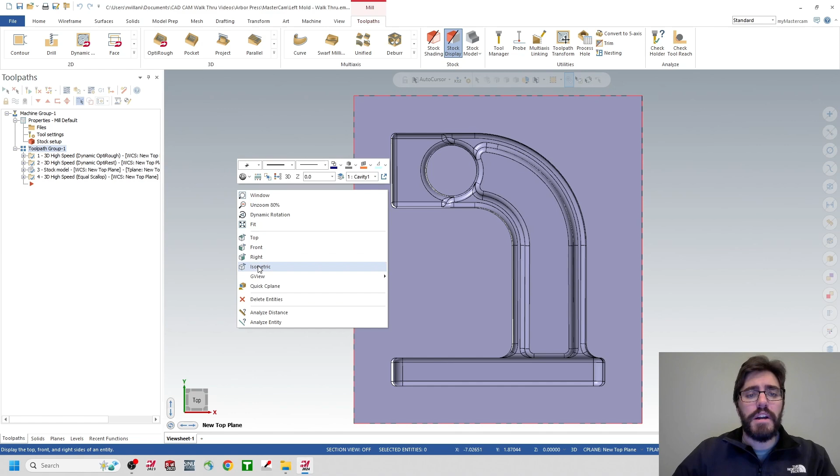In this video, we're going to take a look at the left side mold of our Arbor Press P2 in MasterCam, focusing on the 3D toolpath gallery. On the left-hand side of my operations manager, I'm doing this entire part with just a few toolpaths. I've already finished this, so I'll step through it and then begin the walkthrough. Our first toolpath is going to be an OptiRough using a flat end mill, where we're just trying to remove as much material as possible.

The second toolpath is just going to be a copy-paste of that OptiRough, but instead of a flat end mill, we're going to use a bullnose end mill so that we can clean up some of the corners a little bit easier while still recognizing the stock removed from the first operation.

The next toolpath is going to be a stock model, and we're just trying to recognize all the material that's been removed from the first and second operations so that we can use it and verify. I don't want to have to keep running these toolpaths over and over again, I just want to reference what's been removed.

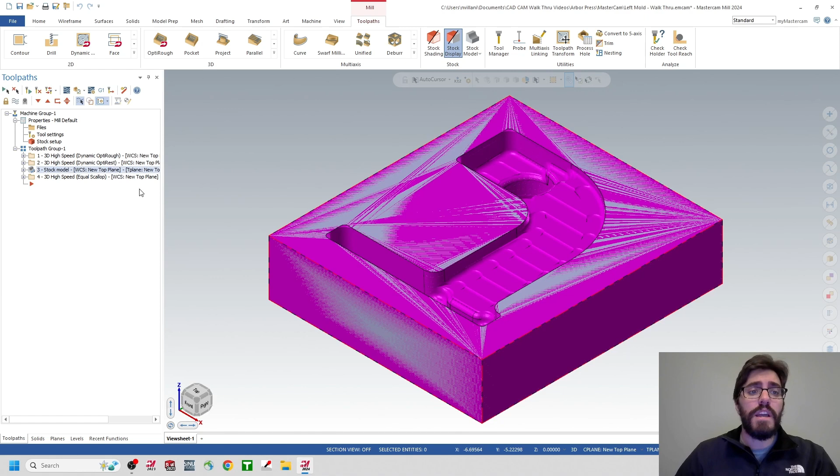Then we can move into our fourth toolpath, which is going to be an equal scallop that we can use to finish all the edges down to their final size using a ball nose end mill. So let's go ahead and get started.

I'm going to delete my entire toolpath group here so that I don't have any toolpaths active in my operations manager. As a disclaimer, I've already set up my tool library as well as my planes and my stock material. So the first toolpath I want to take a look at is the OptiRough.

It's going to be located here in the 3D toolpath gallery, and should be the first icon. But if we hit the drop-down menu, I want to mention that we have a roughing selection as well as a finishing selection. Inside roughing, we're trying to remove as much material as possible, and the finishing selection only focuses on that final pass.

Right now we're just trying to rough, so I'm going to click on the dynamic OptiRough, and this opens up your parameters window for that 3D toolpath. This is going to look a little different from what we're used to seeing in 2D selections, where maybe we're just picking an edge or a continuous chain. Now we're trying to select all the surfaces that are going to be considered for machining.

On the left-hand side of this window we have our machining geometry, and on the right-hand side we have our avoidance geometry. They're represented by the green and red boxes, and I want to focus on the machining geometry first because I want to pick all these internal surfaces for the mold.

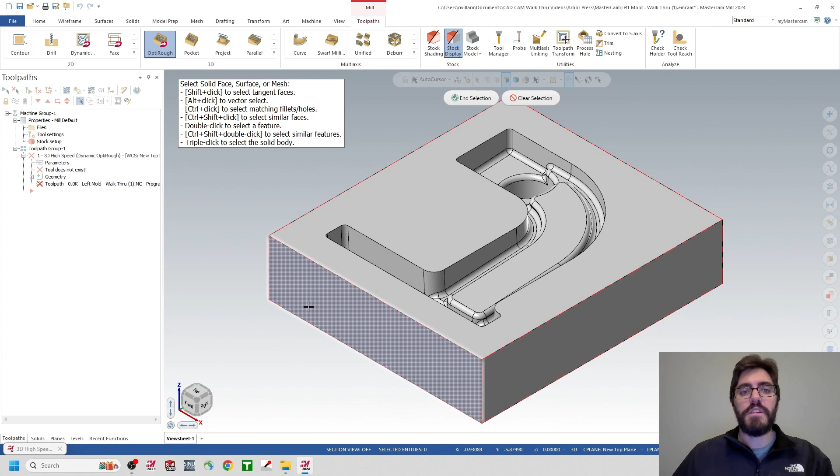On the left-hand side of this window for machining geometry, I'm going to go to the bottom of it, and I should see this mouse pointer. Click on that, and this should start to allow you to make selections to be considered for 3D machining. I want to mention this tooltip window at the top left — it says select solid face, surface, or mesh, and gives you a handful of ways to select these entities without making it too much of a pain on yourself.

For example, if I was clicking on these one by one, I'd have a lot of entities to click. However, if I hold down the shift key and double click on one of these faces, it's going to pick up all the tangential faces in that selection. So click end selection, and you can see now that I've selected 103 entities, currently shown in the background with all these faces highlighted in green.

Additionally, I have the ability to control my wall stock as well as my floor stock. By default, both these values are set to 50 thousandths, and I think that's a little too much. We're going to decrease this down to 10 thousandths — I'll double click on the cell and type 0.01 for wall stock, then double click the cell for floor stock and type 0.01. We're not going to worry about the avoidance geometry.

I'm going to leave this alone for now, and we'll jump down into our toolpath control tab. I'm not going to make any changes here. I want to leave it as the default value, and I'll show you how to troubleshoot this later. The only thing I want to change is our cutting strategy. Currently it's set to from outside, which means the tool will crash into all these sidewalls trying to cut these surfaces. So we're going to toggle this to stay inside, and you can leave the compensation here to center.

We'll jump down into our tool tab. As I said before, we're going to use a flat end mill to try to rough out as much material as possible, so I'm going to use the 5/8 flat end mill here. This is going to be our roughing tool, and I'll just say OptiRough 0.625 end mill for my note.

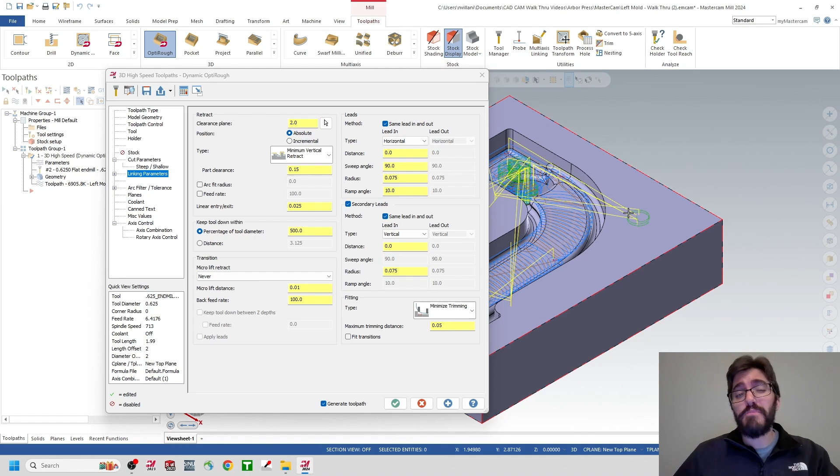Now there are 2 ways we can go about controlling this toolpath so it doesn't enter the areas we didn't specify for machining. The first and probably easiest is to come up here to Model Geometry, click on that, and we have our Machining Geometry section as well as the Avoidance Geometry selection. Right now we don't have anything selected for avoidance, so let's change that.

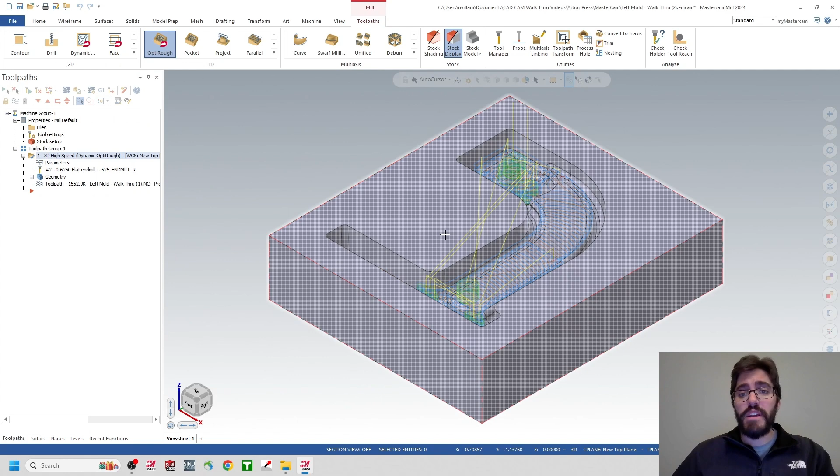We'll go down to the bottom right where we have that mouse button to select entities, click on that, and we're just going to select this entire top face, then click End Selection. You can see our avoidance region is all highlighted here in red. Let's hit the green check mark and let this regenerate. You can see that did a pretty good job at trying to control that toolpath to just this region for that pocket. We no longer have the tool entering in the areas we didn't specify for machining.

And if for whatever reason this avoidance region selection doesn't work for you, the alternate way we can control this toolpath is to use a containment boundary. So really quickly I'll show you how to do that.

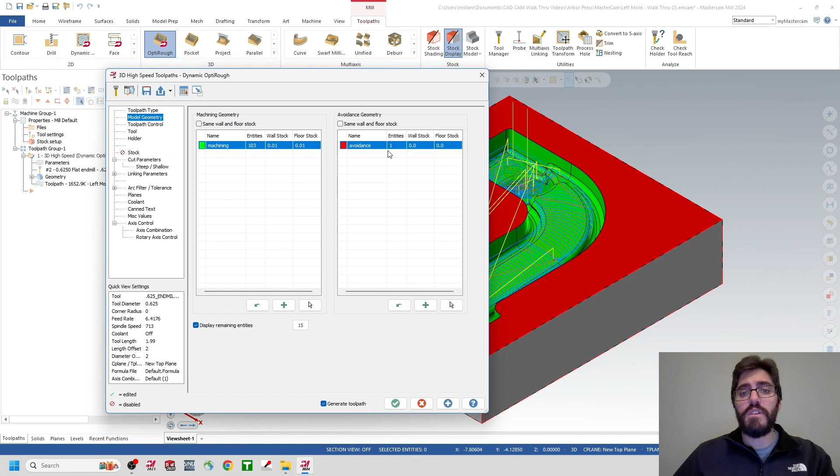We'll go back into our parameters. You can see here in the avoidance region we just have one entity selected. If I want to remove that entity, I just select entities once again, clear the selections, then click End Selections, and now I have 0 entities selected.

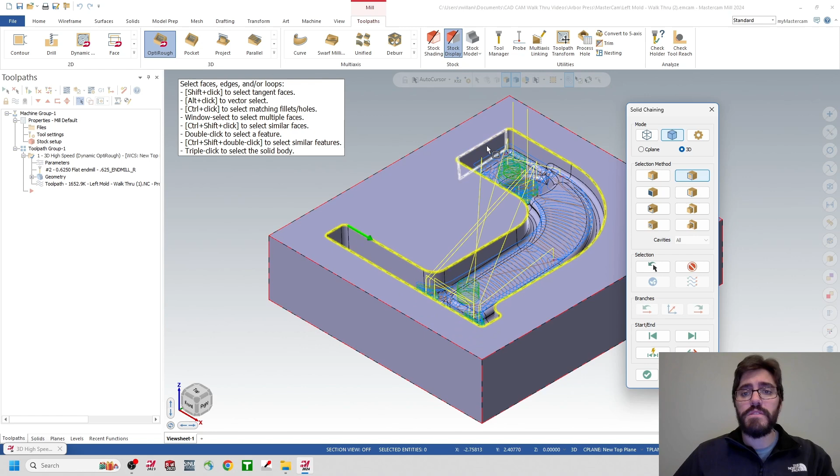Then I'll jump down into my Toolpath Control tab, and we're going to look at the containment boundaries. So the boundary chains right here—we'll click on the mouse button for the containment boundary, making sure we're chaining from a solid loop. We'll select this entire loop on the top face so all of this gets selected, then hit the green check mark, hit it once again, and let that regenerate.

And you can see we're getting the exact same result. We're just using 2 different methods of controlling that toolpath—either using the avoidance region to avoid certain surfaces, or using the containment boundary to force the tool to stay within a specific area.

I can't tell you if one is better than the other. I'm sure there are use case scenarios for both, but I've had a little bit more luck lately using the containment boundary to control that toolpath. So just keep that in mind if you're troubleshooting and not getting the results you want.

Now let's take a look at this toolpath and verify just to double check that we're truly containing ourselves to this region and won't crash into any of the sidewalls. We'll move over here on the left-hand side in our Operations Manager. At the top of the window, we'll click on Verify, and then I'm just going to let this play out. So click Play.

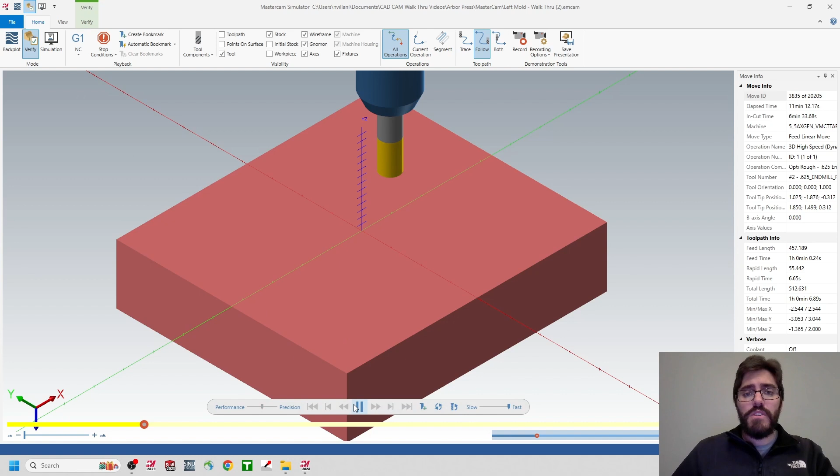You can see that the toolpath is now contained to that region, and we're just traveling around the outside contour of that mold, stair-stepping down as we go, which is cleaning up as much material as possible. This is going to take a lot of cutting pressure off the next toolpath, the bullnose end mill, and eventually the finishing toolpath for the ball nose end mill. I think we did a pretty great job roughing this out, and we can move into the next toolpath, which will be a roughing operation using the bullnose end mill.

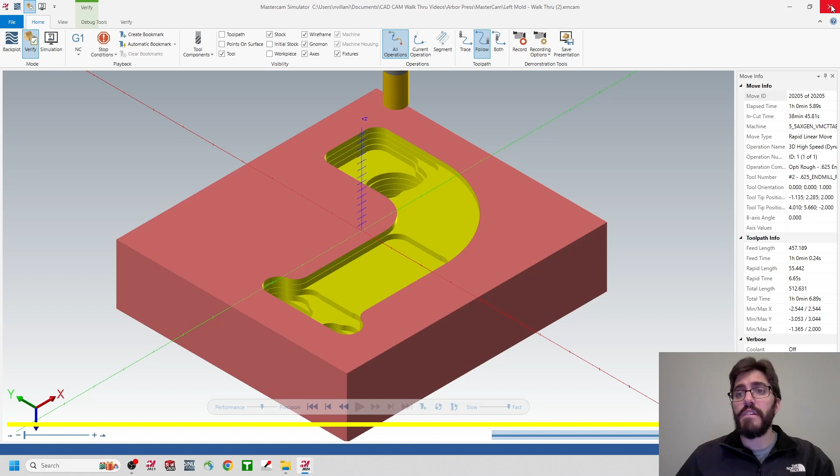So let's back out of Verify here. I think I'm just going to copy and paste this OptiRough because I'm really happy with how it performed, and we already have all of our selections populated. Let's move over here on the left-hand side in our Operations Manager and double check that you have a check mark next to that OptiRough we just created. If you see that, right-click on that toolpath, and from the drop-down menu select Copy.

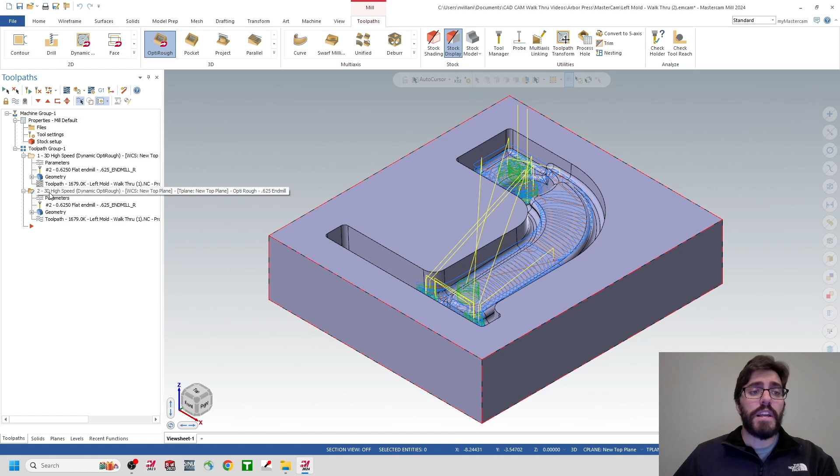Find your red arrow, and then to the right of that, right click, and from this drop down menu, select paste. You can see we've copied and pasted that toolpath, and in this second toolpath here, we're just going to double click on parameters to open up our parameters window.

Now we're just going to make a few changes here. I'm going to jump over into my tool tab. Inside tool, we're going to change from the 5/8 flat end mill, and scroll down until we find our 1/2 inch bullnose end mill. This is going to be tool number 13, and whenever I switch tools, make sure you right click on that tool and reinitialize the speeds and feeds so our cutting parameters get updated. Likewise, down here in the comments, we want to update this to a 1/2 inch bullnose.

Then I just want to double check my available cutting length on this tool. Up here in the tool library, I'm going to double click on that 1/2 inch bullnose end mill, and this opens up the edit tool window. I never like making changes here, but I just want to double check some parameters. I can see that my cutting length is 0.59375. And while that might be good, I do not like pushing spherical tools past their radius tip.

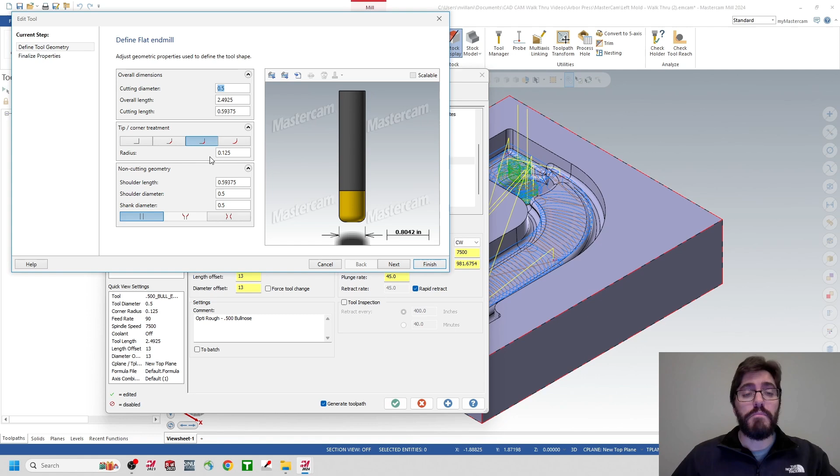So this radius on this tool is 0.125, which means that my depth of cut per pass should only be an 1/8 inch. I'm just going to keep that in mind when setting that up in my cutting parameters, but I'll come down here to cancel so I don't save any changes, and then jump down into my cut parameters.

Next, we'll take a look at the stock that we're leaving on the floor and the walls. We'll jump up here to our model geometry tab. Inside model geometry, I can see that the stock left on the wall and the floor is still set to 10 thousandths. I think I want to get a little bit closer before I move into my finishing toolpath with that ball nose end mill, so I'm going to update this from 10 thousandths to 5 thousandths. Double click on each one of these cells, and I'll just do 0.005 — one for the wall, and then double click for the floor and make that 0.005 as well.

Now, the last thing we want to do is activate our rest material, because we want to communicate to this toolpath that we've removed material from previous toolpaths. Think back to that 5/8 flat end mill OptiRough we did for the first toolpath operation. I'll jump over here to the stock tab, and we want to activate or turn on the rest material. We'll click that checkbox, and instead of looking at all groups for the previous operation, we'll hit the drop down menu and restrict this to only look at this toolpath group.

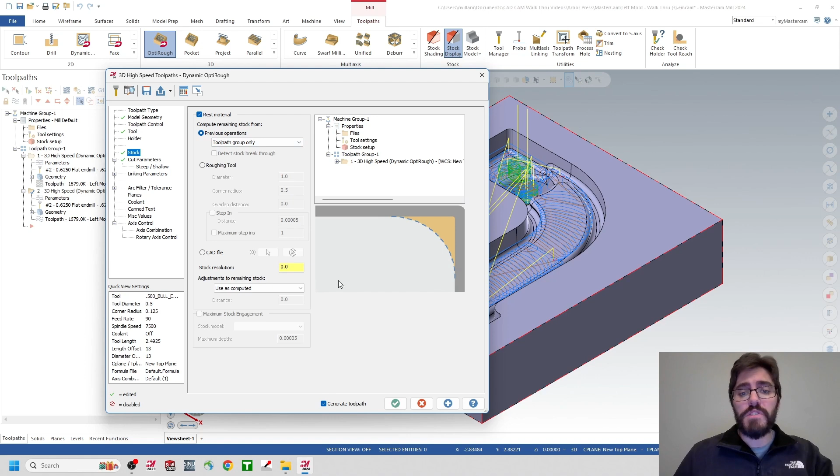Then we'll just hit the green check mark and let this toolpath regenerate. This could take a little bit of time to calculate out — there are a lot of surfaces to consider. Just to assure you that you aren't crashing your system, in the left-hand side of the operations manager, you should see an icon of a green ladder next to this toolpath, letting you know it's being calculated, and once it's finished, it'll actually regenerate.

Once you see your toolpath regenerated, we're going to take a look at both of these operations in Verify. I'll select my entire toolpath group 1 — you should see a check mark next to each one of these toolpaths — and I'll select Verify here from the top of the window. This could take a second to calculate out as well. You can see down here that our playback bar is getting longer and longer, and then I'll just hit the play button to let this run out.

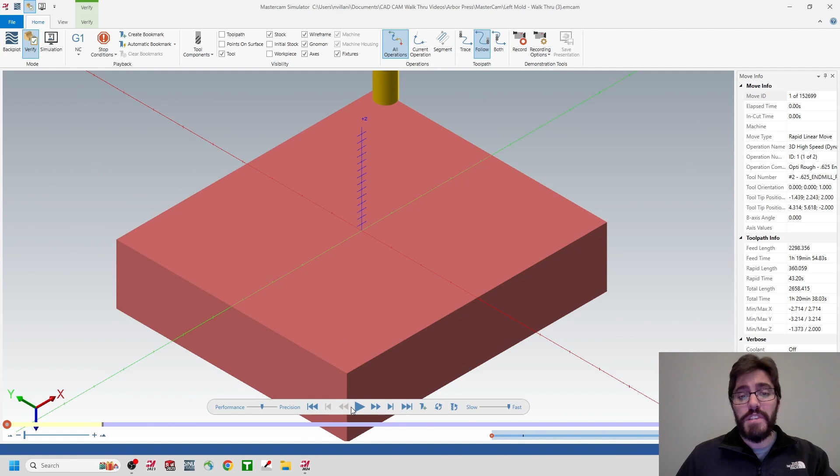You can see the first toolpath operation is that OptiRough that we use the 5/8 flat end mill, and we're just trying to remove as much material as possible.

The second toolpath operation here in blue is going to be the copy-pasted OptiRough, but we changed out that 5/8 flat end mill for a 1/2 inch bullnose end mill with a 0.125 radius in the corner. This is getting us a little bit closer to near net shape because we reduced the stock to leave on the walls and the floor to about 5 thousandths.

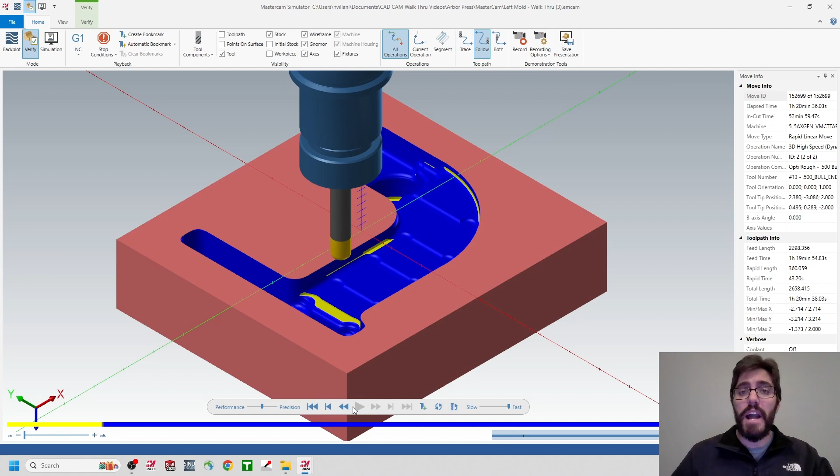That 0.125 radius is getting us a nice smooth transition between all of our steps, and this is going to make it a little bit easier for that ball mill to come in and finish all these edges with our equal scallop operation. So this looks pretty good to me. I think we're pretty much done with roughing. So let's go ahead and back out of Verify and look at our next toolpath.

Now, I think I want to create a stock model that references both of these toolpaths. That way, when I run the next toolpath in Verify, I don't have to keep running these over and over again. If you look back at the duration, I bet it was somewhere around 1 minute, and you don't want to be sitting there for a minute every single time just to check a toolpath.

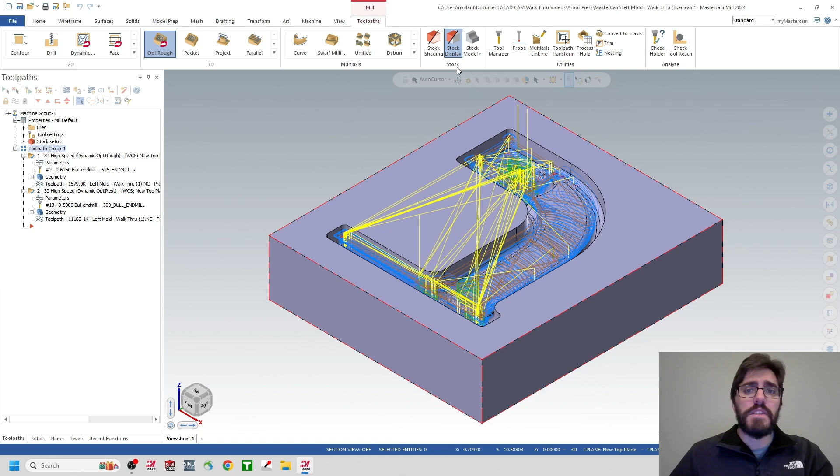So let's just make sure that we're here inside of our Toolpaths tab, and inside of Toolpaths, I want you to locate the stock section. We're going to find a gray half-pipe looking icon for stock model. Click on that icon, and this is going to open up the stock model window.

We're going to rename this stock model to Rough Op, and then we're going to change it from this gray color here. We're going to click on the color palette. We'll make it something nice and bright like pink, and we'll hit the green check mark, and then we want to make sure that we are referencing the stock plane that we set up for this part.

So I had to reorientate my planes. I created this new top plane, so I'm using that. And then I want to link this back to the stock setup that I created earlier, so click on stock setup so that we can recognize our X, Y, and Z extents.

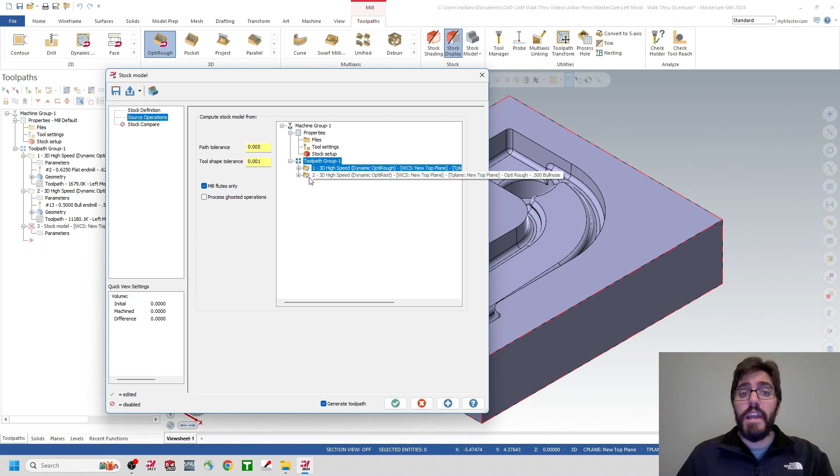From here, we'll jump down into our source operations tab, and we're just trying to communicate with the stock model what toolpath do we want to run against it for material removal. So I'll just select my entire toolpath group 1 so that both of these toolpaths are highlighted. Just make sure that you're seeing a check mark next to each one of these toolpaths, and then we can come down here to the green check mark and let this regenerate.

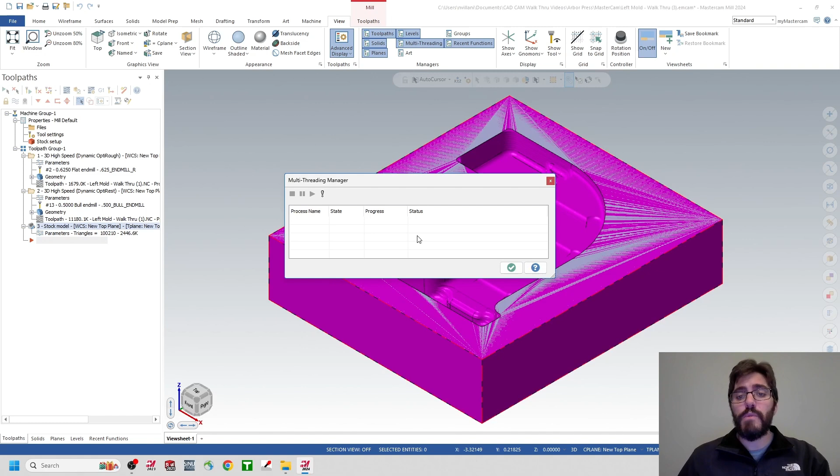This is going to take a little bit of time to calculate out because we are basically running both these toolpaths in the background. We can see that icon for the green ladder next to the stock model. And if you wanted to, you can go to the View tab and you can go to Multi-Threading and you can see all this being processed in the background. So once it's completed, we can hit the green check mark to close out of the multi-threading, and you can see that we've created a nice stock model for both of those toolpaths.

So let's just jump back here into our toolpaths tab and we can take a look at our next toolpath, which is going to be the final or the finishing toolpath for Equal Scallop. So let's jump down here into our 3D toolpaths gallery, and we're going to have to expand this out, so hit the drop down arrow. Before we were looking at roughing operations, now we're going to be looking at our finishing operation.

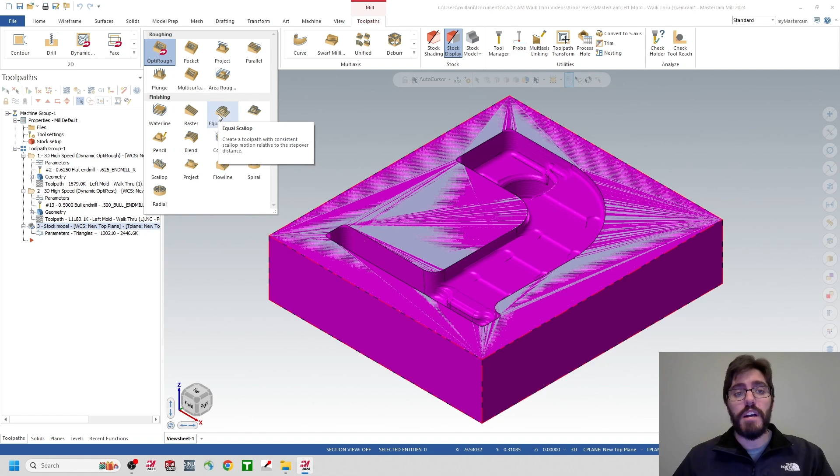In this finishing section, the first row, the third icon to the right is going to be Equal Scallop. So click on Equal Scallop, and this is going to open up your parameters window. Now, setting up this Equal Scallop is going to look a whole lot like setting up our OptiRough from earlier. We're going to have fields here for our machining geometry as well as our avoidance geometry, and we just have to populate both these criteria to create this toolpath.

So underneath the machining geometry, we're going to go ahead and select some entities. Click on this little mouse button. We're going to hold down the Shift key and we're going to double click on one of these faces so that we select all the tangential faces in this cavity.

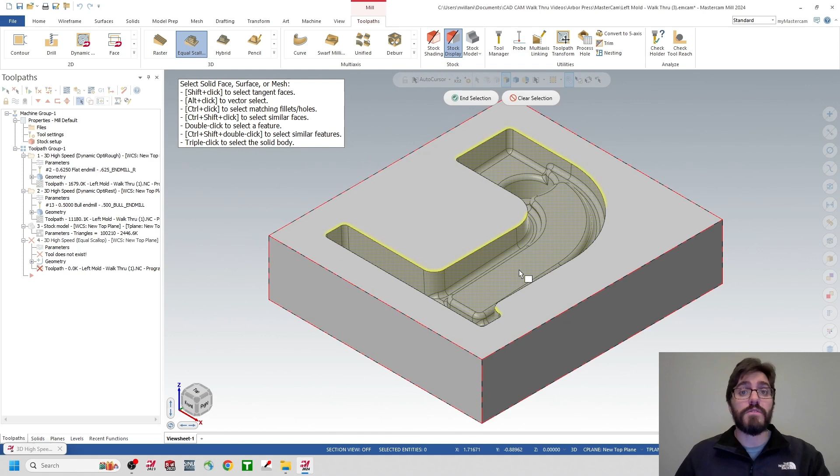We'll select End Selection, and you can see that we've now selected 103 entities that are being shown here in green. The only difference from before is we were leaving 5 thousandths on the wall on the floor, or 10 thousandths on the wall on the floor.

We're going to update this to 0 because this is going to be our finishing pass. Double click on wall, change this to 0, and then double click on floor and change that to 0 as well. Next, we'll take a look at our avoidance geometry.

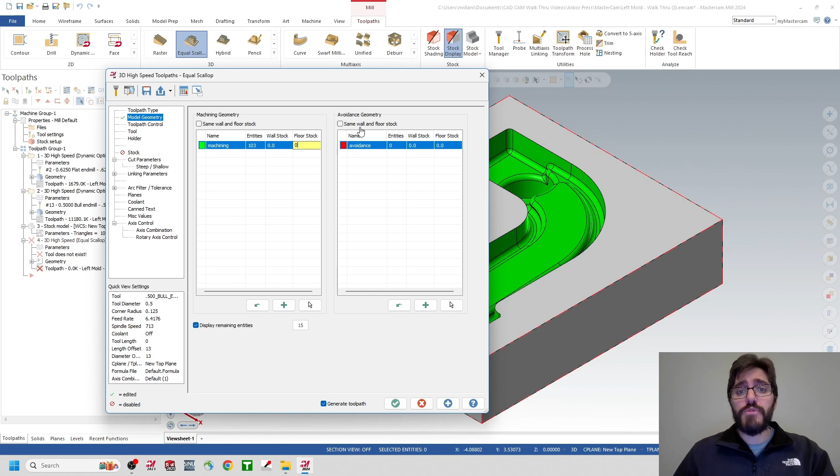Right now we have no entity selected, so we're going to come down here to select these entities. I'm going to select this top face, hit End Selection, and you can see that we have one entity selected, shown there in red.

Next, we'll move down here into our toolpath control. As I said before, if your avoidance region isn't working, you may have to come back into this toolpath control tab to troubleshoot using the containment boundary. So just keep that in the back of your mind if your toolpath isn't working out.

As far as the strategy, contain, and compensate to, we can leave this all the same, and we can just move down here into our tool tab.

Picking a finishing tool can be a little complicated, and I think a lot of people will assume they have to use the smallest ball mill in their tool library to finish up some of these details. While that might be true and helpful because you're trying to reach down into tight areas, you might run into issues with the size of that tool trying to reach these deep pockets. If you look at our tool library, we really only have 2 tools that can reach down this deep.

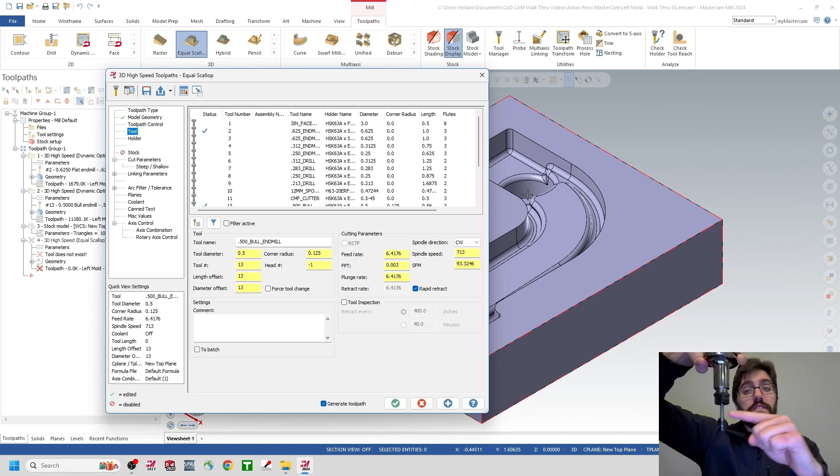That's going to be the 1/8 ball mill, which is a really great tool—I use this for a lot of applications. However, something to consider with this tool is that it has a shoulder on it, and this shoulder may prevent you from cleaning up all of your edges before it hits the sidewall of the part. So this might not be the greatest application, and if you try using this 1/8 ball mill, you may not finish all of your edges.

The other tool available to us is this 250 ball end mill, and I think this is going to be the best use case scenario for this application. If you look at these 2 tools side by side, they have the exact same holder, and the tool is sticking out past the holder the exact same length.

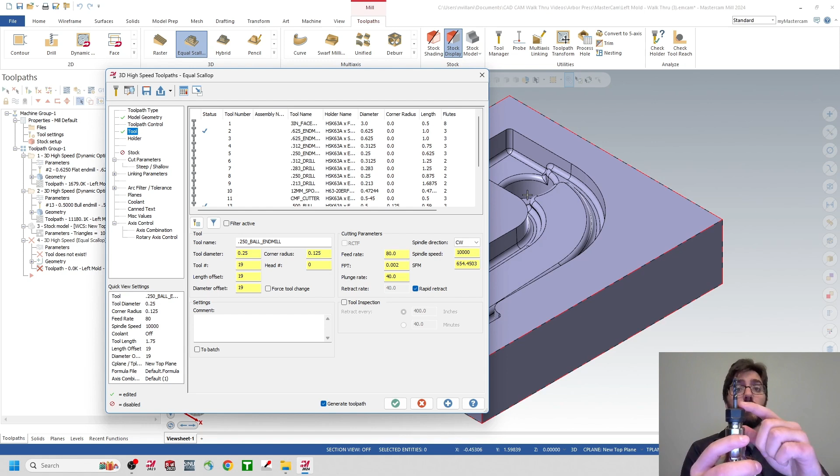However, with this 250 ball end mill, we don't have a shoulder to worry about because it's size on size with the diameter of the tool. So I think this is going to allow us to reach down into those pockets and finish all of our surfaces with one tool.

So let's find that 250 ball end mill here in our tool library. I'm just going to scroll all the way down to the bottom, find that 19th tool, which is going to be that 250 ball end mill. We'll select on that. For my comment here, I'm just going to say 0.250 ball mill, finish. And then we'll jump down into our cut parameters.

Inside of cut parameters, I'm going to leave everything default except for one detail: the passes for our step over. Currently this is set to 25 thousandths, which might be okay for just trying to see how this toolpath will look, but for a finishing toolpath you're probably going to start to see these step over scallops if you're up here at 25 thousandths step over.

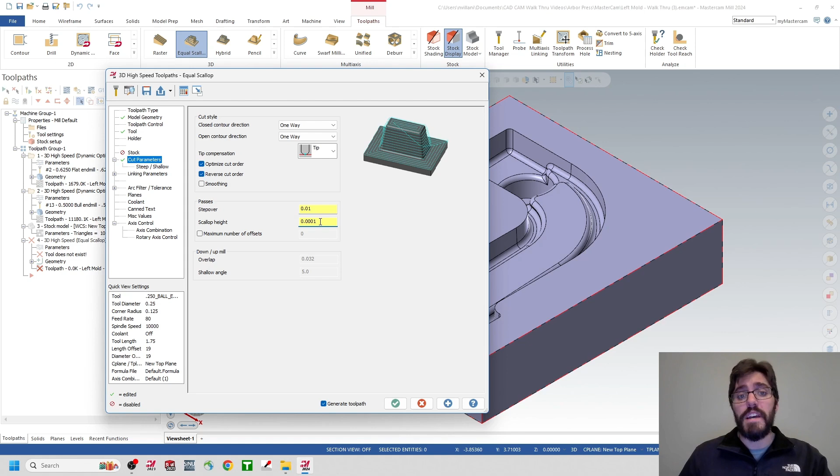So I'm going to decrease this down to 0.01, so 10 thousandths step over. That's still a little too much in my opinion—in industry I might make it like 3 thousandths, but I don't want to crash your computer. So we're going to come down to 10 thousandths, and we'll see when we click on the scallop height, this is going to get updated and it's going to be like a 1/10 scallop height. So you might see that, but it will still be pretty smooth.

We'll come down here to steep shallow. We can activate the minimum and the maximum depth, and detect the limits, and you can see that 0 is going to be up here at the top, and then the depth here is going to be down in the pocket. We'll go into our linking parameters.

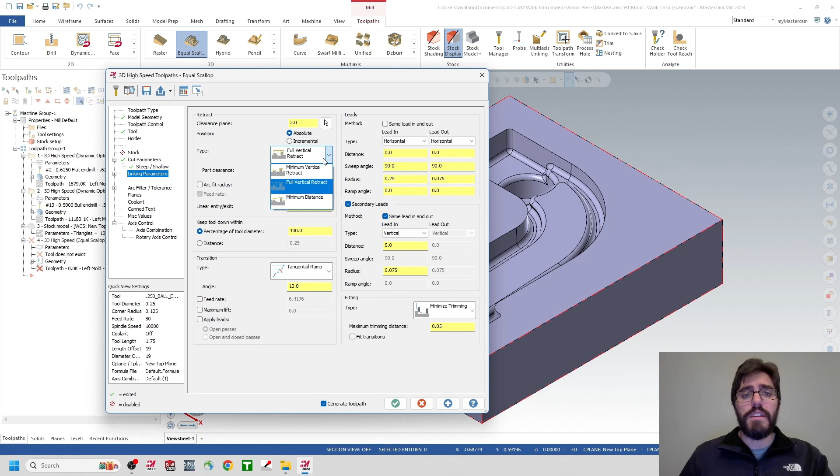As I mentioned before, the full vertical retract, we want to update that. Hit the drop-down menu to minimum vertical retract, and then we'll hit the green check mark and let this toolpath regenerate.

Now, this is going to be one of those toolpaths that will probably take a while to generate here, so just be patient, and you may want to check in on your view tab. If you go up here to view, you can go over to our multi-threading, and you can see what's currently being processed. It looked like that just finished up in the background there for me.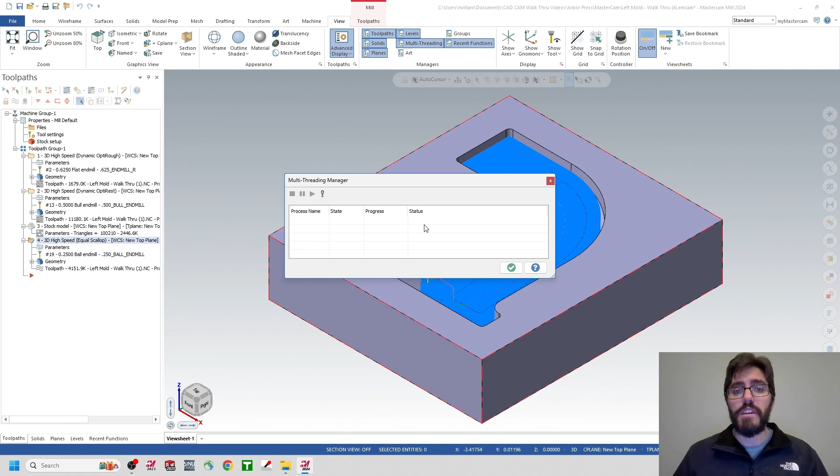But if your toolpath is taking a while, you can always just double check here in multi-threading. I'll hit the green check mark, and I can see that this toolpath looks pretty great for a finishing operation. So I'm just going to move my model around to make sure that we are cleaning up in each one of these deep pockets. It looks like we're not having any issues with reach.

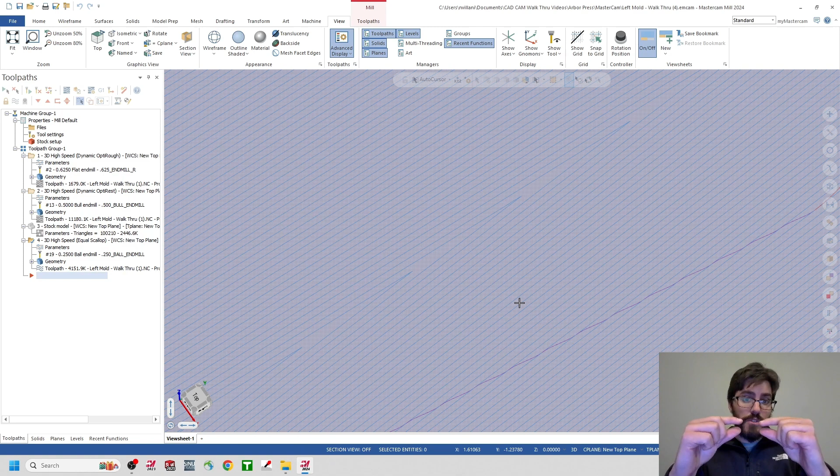And if we zoom in here to these toolpaths, you can actually see these little blue overlapping lines. This is going to be your step over that we just created. So we set this up at 10 thousandths, and there's going to be like a little scallop in between each one of these lines. In industry, I mentioned that we're trying to go to like 3 thousandths step over, so these lines are going to get closer and closer together. Just keep that in mind with how smooth you want to make your part. You can always go back in your parameters and try to make those changes.

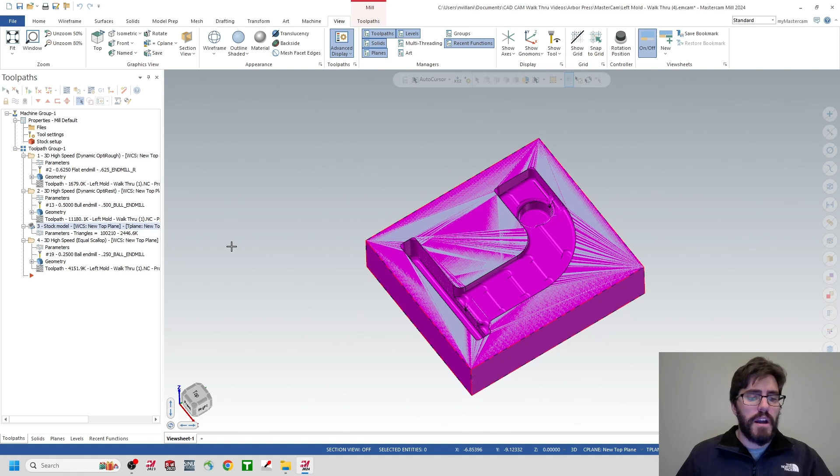However, I want to run this toolpath and verify to see how it looks against that stock model that we created earlier. So I'm just going to move this around and center this. And then in the left-hand side in my operations manager, I'm going to select that stock model, hold down the shift key, and then also select that equal scallop that we just created.

Now, just double check that you only have two toolpaths selected. There should be a check mark next to stock model and then our equal scallop. If you see a check mark next to either one of these OptiRoughs, you're going to run them and verify when you try to play this out, and it's just going to take too much time. That's the whole reason why we made the stock model, to save ourselves that time from running those toolpaths over and over again. So have these two toolpaths selected.

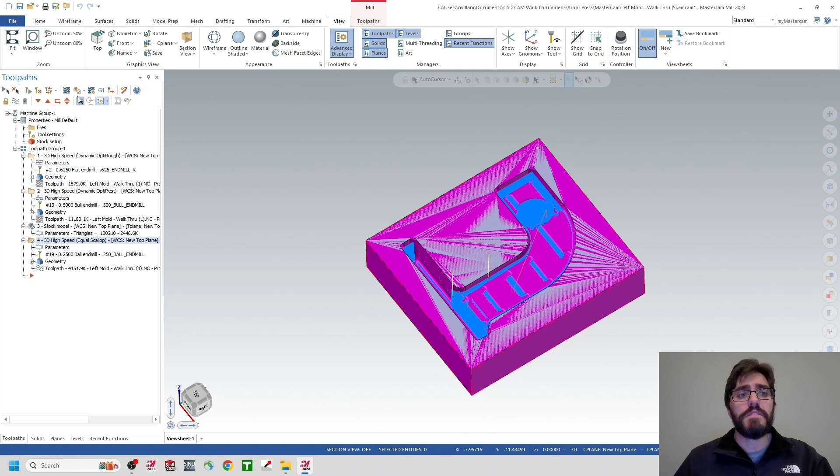We'll come up here and we'll just select verify, and this is going to take a second to load. And we can see our stock model out here represented in pink, and it's going to have those two OptiRoughs ran against it. Right now, we're only trying to run that equal scallop, so we'll hit play. And we can see that toolpath start to expand out here from the center. So this is looking pretty good.

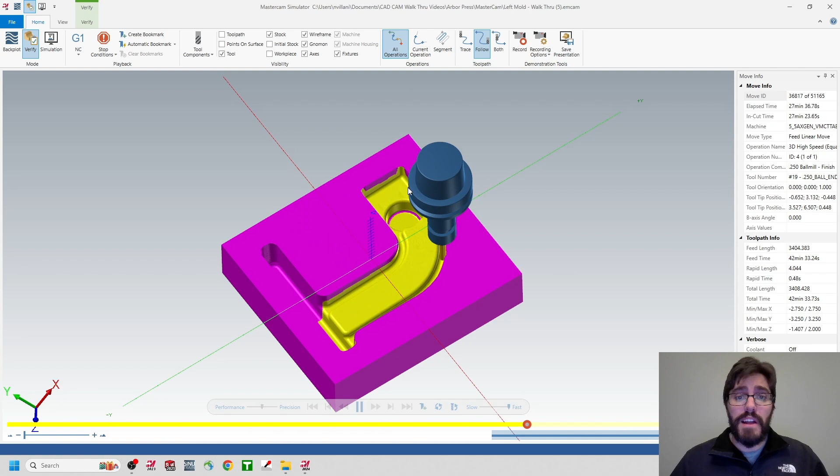I'm not seeing any issues yet, where it looks like we're cleaning up all the edges here at the bottom, and we have no issues with these sidewalls.

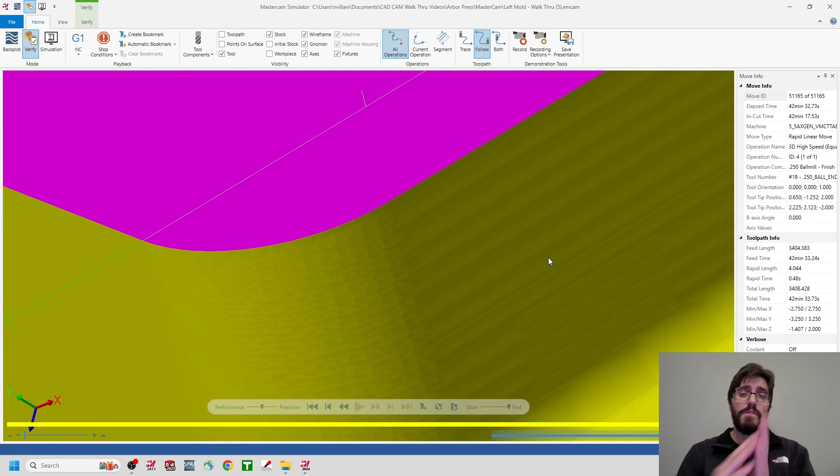The only thing that I might consider to change here, again, is that step over percentage or that step over rate, because you can start to see some of these scallops here. And that 10 thousandths might start to be exaggerated when you're going up an angle. However, if we make it like 3 thousandths, we might start to control that just a little bit better.

And the only issue I saw here was the bottom of this edge. And that's because we have a flat surface with a sharp corner, and we're never going to clean up that corner with a ball nose end mill. We'd probably have to come back in with a flat end mill and just do like a contour or a circle mill, which isn't really that big of a deal.

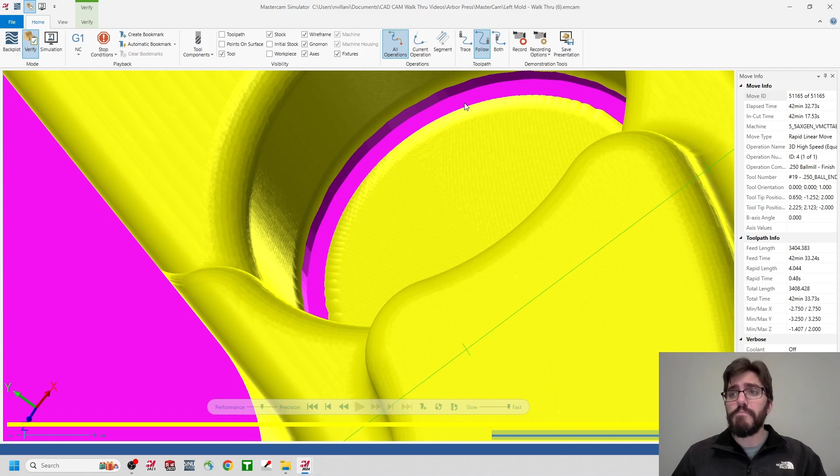As far as the rest of these surfaces go, we did like 99.9% of it using just OptiRough and Equal Scallop. So I'm really happy with how we ended up here. I'm going to back out of verify, and we can go ahead and save this. I'll just right click, go to isometric.

So if you ever wanted to do the right side mold, you can just follow this exact same workflow on the opposite piece. Or if you wanted to, inside of MasterCam, you could just probably mirror all these toolpaths over the y-axis.